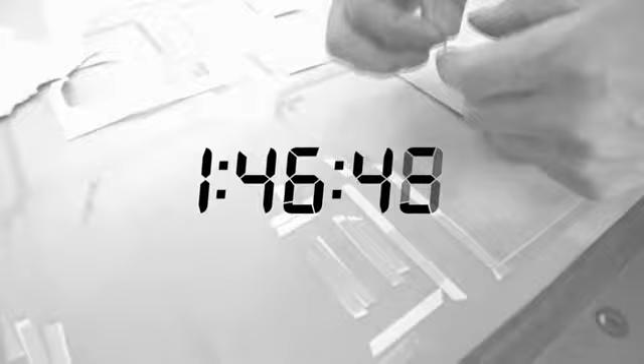Cutting die plate pressure adjustment has always taken forever, and of course, that means time spent with the machinery not running. Today's work took 3 hours of adjustment time. Does this sound familiar to you? We got tired of just accepting conventional thinking, so we developed a brand new way to cut pressure adjustment time by 2/3, using our incredible press balance technology.

When do you need to compensate for unevenness? There are 2 sources of unevenness, the die and the machine. Our research found that the majority of adjustment prep time was wasted on unsuccessful compensation for the unevenness of the cutting machine's flatbed. Reducing this setup time would lead to a significant increase in factory floor productivity, while driving down costs for any die cutting operation.

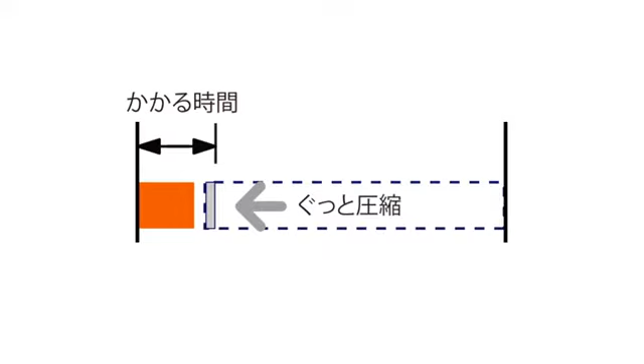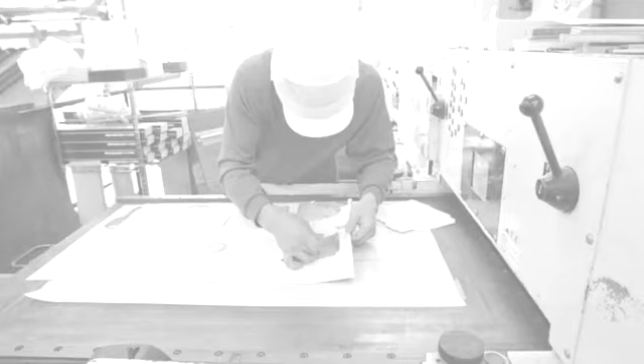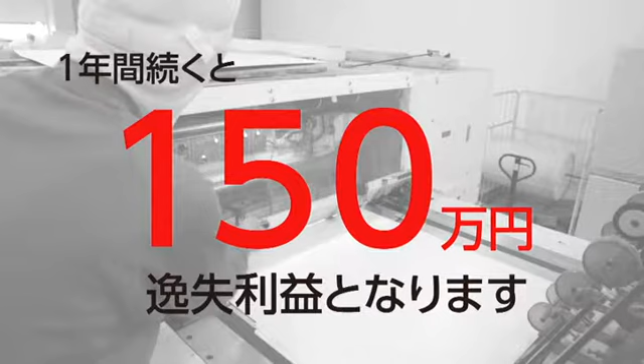Don't you agree? For example, suppose that the average adjustment prep time for a new die took 30 minutes. If you use 10 new dies a month with your cutter, that's 300 minutes, or 5 hours spent making adjustments each month. If each hour of that time could be spent doing 5,000 die cuts at 5 yen apiece, that's a potential 125,000 yen lost each month. Over the course of a year, that's 1.5 million yen's worth of potential production lost.

With our press balance technology, this prep time is cut by 2/3, letting you get back 1 million yen's worth of lost product time each year. And that's just for a single machine. If you have multiple die cutters, your savings could be even greater. Have you ever stopped to think about just how much potential production time you've lost over the years? Our press balance technology will help you change that.

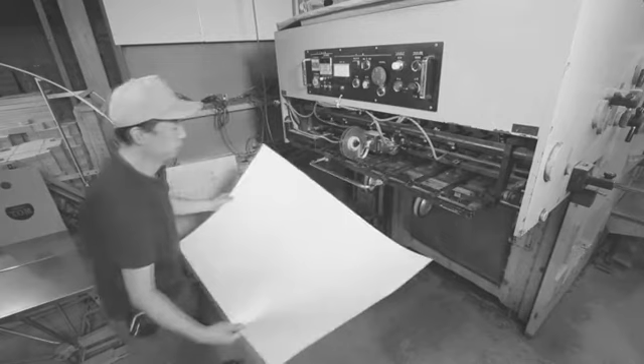First of all, we asked ourselves, why are die cutter uneven pressure adjustments necessary in the first place? Of course, if you run a die cutting press for a long time, various things will cause the flatbed to develop surface unevenness. And nothing is more difficult than accurately making the precise micro adjustments needed to make the flatbed surface perfectly even. We had a theory that uneven cutting pressure isn't caused by unevenness in the dies themselves, but because the flatbed surface itself has bumps and dips rather than being totally flat.

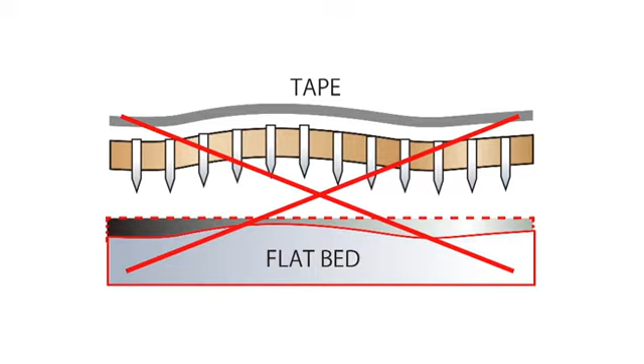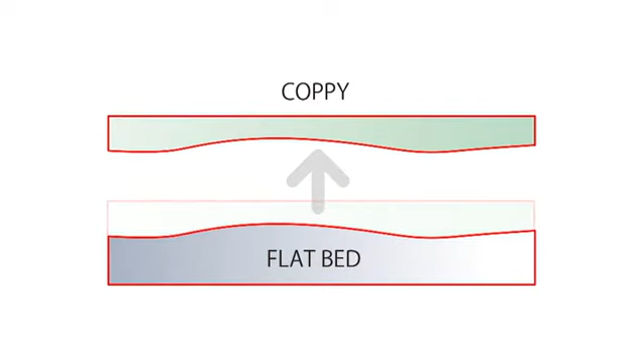And of course, if you adjust the height of the flatbed, then each cutting die's adjustment has to be done again. It became clear to us that this was a huge source of production inefficiency. There must be a solution, we thought. There must be some way to stop this problem at its source. And the idea we came up with was simple. We would trace the uneven cutting pressure. If we could just trace the unevenness of the cutting die pressure onto something else, and then invert that, maybe it could cancel out the unevenness. It was the moment we had this realization that our press balance sheet was born.

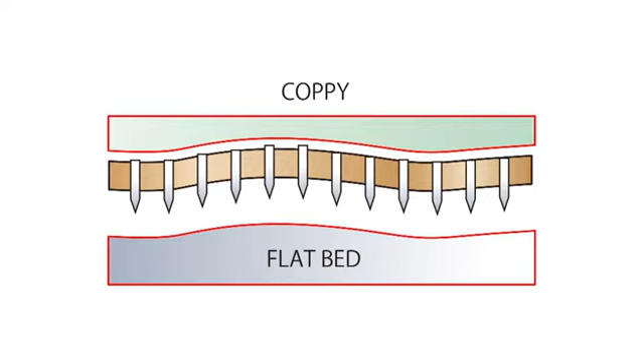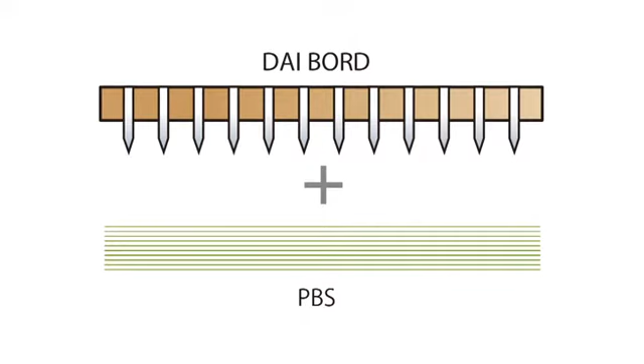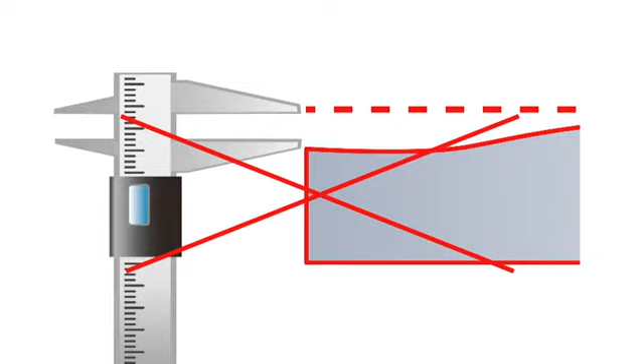We tried every possible way to trace the uneven pressure in order to get it right. Our breakthrough came when we used 10 thin layers of film with a specialized cutting die, allowing us to precisely trace the uneven pressure. People used to think that pressure adjustments required precise microscopic measurements of the flatbed height, but with our press balance technology, there's absolutely no need for any of that, and no need for a specialist. Anyone can do it. Here's how our press balance sheet works.

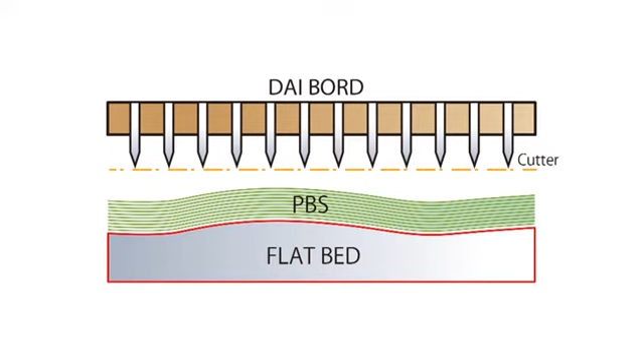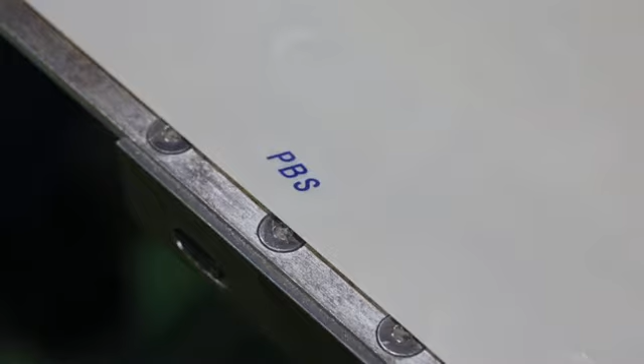Put our press balance sheet setup die into your die cutter, then place the layered press balance sheet film on top of the flatbed. The layered film consists of 10 20-micron layers totaling 0.2 millimeters thick. The layers are held together with a gentle adhesive. This 20 micron film is from the world's toughest resin, developed by the Japanese resin maker Toray and used in aircraft bodies. Half cut the layered film.

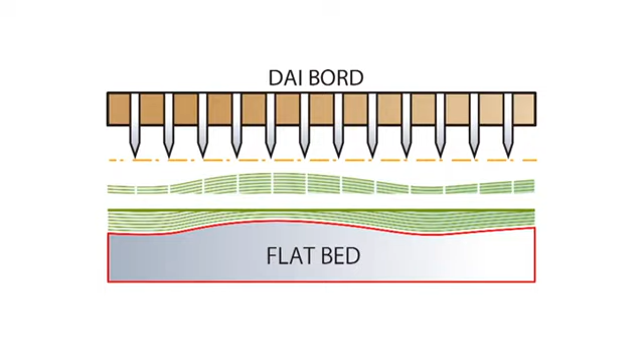Adjust the stroke of your die press cutter to cut partway through the layered film. The raised areas on your flatbed will have more layers cut, and the lower areas will have fewer layers cut. Remove the cut film. After that, the cut film can be removed at 50 millimeters pitch. The uncut film can't be removed. The press balance sheet is complete. Now, with your press balance sheet, you don't have to measure the height of your flatbed to get incredibly precise evenness across your flatbed. To increase durability to handle everyday use, cover both sides with the protective sheets.

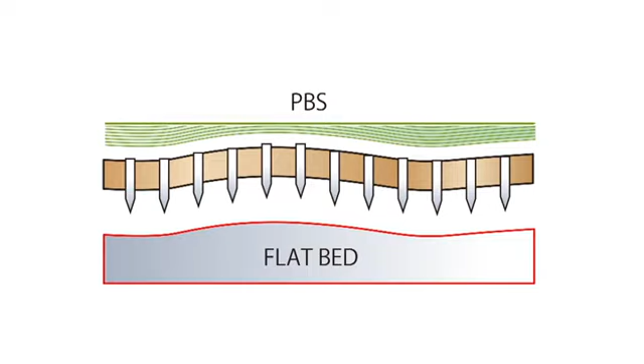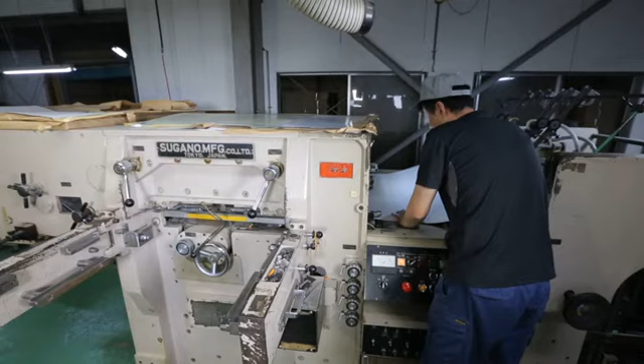How to use your press balance sheet. Place your press balance sheet inside its protective sheets on the back of the cutting die, then the die, and apply pressure adjustment tape as usual. The unevenness from the machine itself is gone, so all you need to adjust is the die itself. The press balance sheet can be left inside of your die cutting machine. If you want to use your old adjustments for your dies, just take the press balance sheet out while you use them. So what do you think?

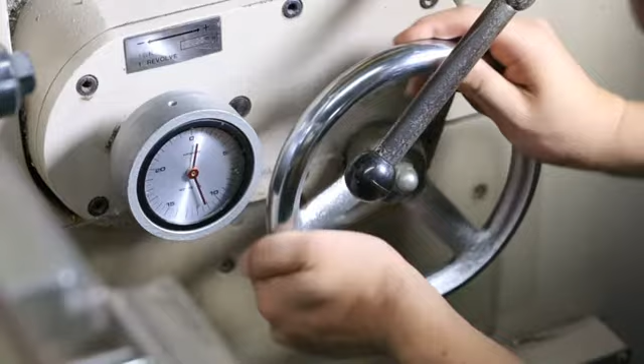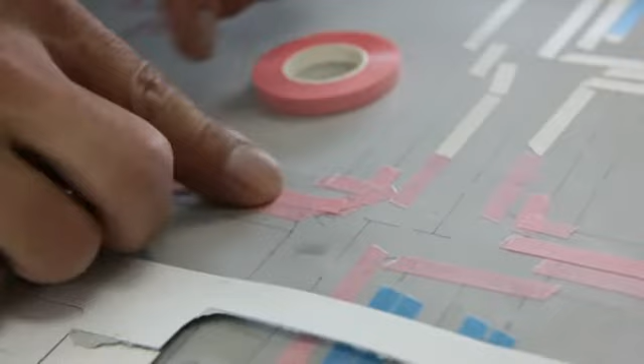With our press balance technology, the more cutting dies you have, the more prep time you'll save. Think of all the extra time you could be spending on your real work and all the lost production time you could have back. The internationally patented technology behind our press balance sheet is being used for cutting dies throughout North America, Germany, and the rest of Europe, and all throughout Asia. The press balance sheet is helping increase production and reduce stress worldwide. At Counterplate Japan, our dream is to help make things better for everyone.